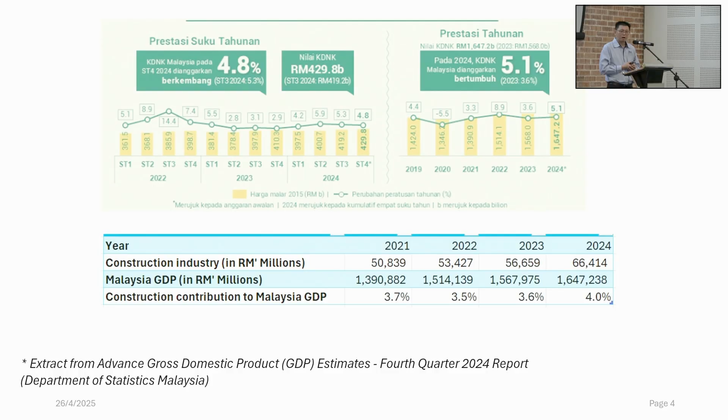Okay, these are the challenges I just mentioned. Skilled labor shortage, and then also we find that by using conventional, a lot of time, not all. I think in this building the finishes are excellent. A lot of time we find that the client or the contractor complains to us, saying, I couldn't get the kind of finishes that my spec or my customer wants.

And then also traditional construction practice has a very high carbon footprint, and the two contributors to the carbon footprint are actually concrete, because in order to produce concrete we need to use a lot of heat, and the same goes for the rebars. So for traditional construction, the two main ingredients that we use are rebar and concrete, right? So it's not that precast does not use that, but with precast we can actually reduce the usage of concrete by optimizing the design, and also because it's done in a controlled factory environment, we are able to reduce the wastages, right?

And then the construction industry, in traditional construction, is also labor intensive, because first of all we need a carpenter, then we need a bar bender, then we need a concreter, etc. There are so many trades inside the construction industry.

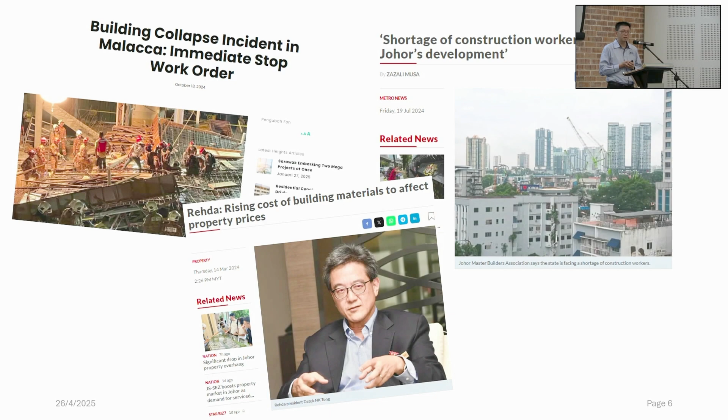Okay, so to overcome this, the precast concrete system can provide the industry a very sustainable construction method. On the environmental side, we can actually reduce material wastages, because like I mentioned, everything is done in a controlled factory environment. The concrete batching, the rebars, everything is prefabricated, and we only batch as much concrete as we require, and the concrete only travels within the factory, so you don't have wastage from concrete hardening and things like that.

Normally in a precast factory, we strive for energy efficiency by using solar panels and green resources. For example, instead of diesel, we use LPG, right? And in the factory we also recycle the aggregates. For example, when we batch concrete and still have a little leftover, we can recycle the aggregates for the next batches, right?

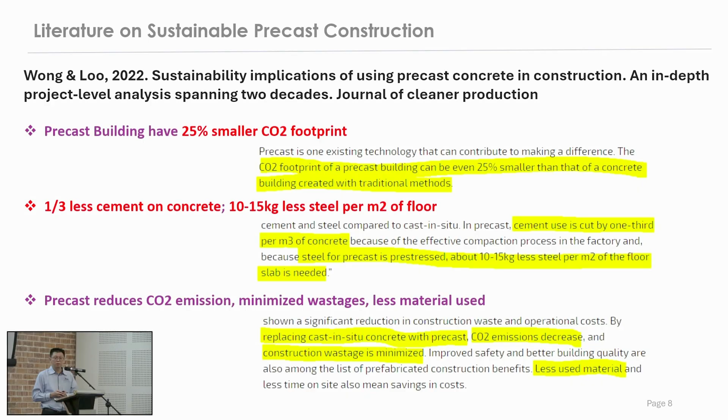And like I mentioned, in our products we use green concrete. Green concrete means we are replacing cement with alternatives such as fly ash and GGBS. And for the key ingredient sand, instead of using river sand, we can also use manufactured sand. What is manufactured sand? It is actually a byproduct of the quarry. We crush the rocks and make it into sand. And the advantage of manufactured sand is that it is more consistent.

I think the supply is also more sustainable, because with river sand sometimes we face the problem that you dig so much and it pollutes the river, then the authority will come in and say, hey, stop, you can't. So we will have supply issues. But if you use manufactured sand, your supply is very consistent because you actually crush it. You don't go and dig.

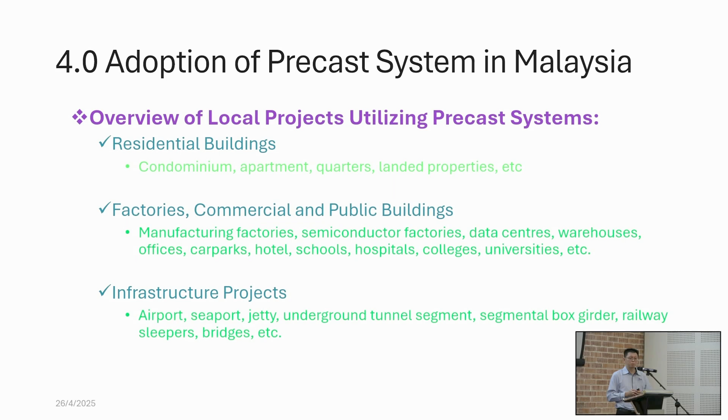So where are precast systems used in Malaysia? Generally, it has been used in all kinds of buildings - residential, industrial, commercial, public buildings, even in infrastructure projects. In the next slides, I'm going to show you the typical precast components used in Malaysia. The most common one is actually the hollow core slab.

The advantages of a hollow core slab is it can actually span very long. In Malaysia, we have done hollow core slabs up to 16, 17 meters. During construction, you do not need to prop. Later on I'll show you some site pictures where you span the slab 16 meters and you do not need to prop it. And hollow core slabs normally are able to take higher load because it is pre-stressed.

Beside hollow core slab, we have other slabs. We have the double T slabs - these are generally used for industrial buildings. And we have precast plank.

For columns, it's just like any columns, but normally precast columns will have a bit of corbel. Some architects may say, hey, corbel very ugly. But we try to make it nicer by introducing a funnel-shaped corbel. Later on, in the photo session, I can share with you some pictures of columns with corbels. Then you can tell me whether it's acceptable to you or not.

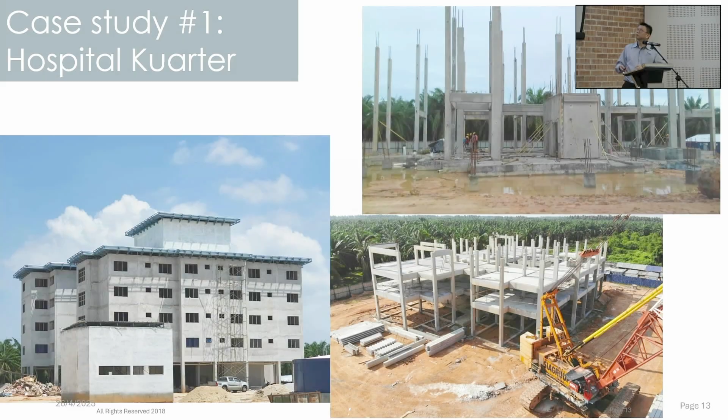And also what we normally do is it's an unpropped system. So you don't see scaffold on the site.

And this is IKEA. In fact, in Malaysia, there are 4 IKEAs. We started off with Damansara, then Cheras, and then we have Tebrau, and then lastly we have Batu Kawan. All 4 IKEAs are a total precast building.

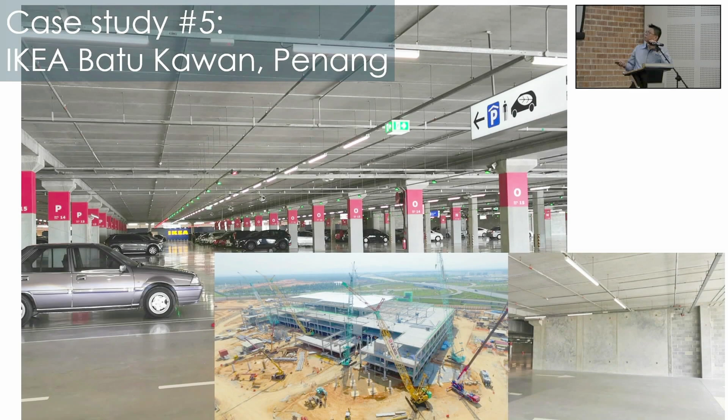There's a lot of restriction on your machinery height, and also your working hours. So in order to do it fast, to do it quick, what we do is we introduce multi-tier columns, and then we do the floor by floor on the beams and the slabs, and we try to minimize the number of components to install on site.

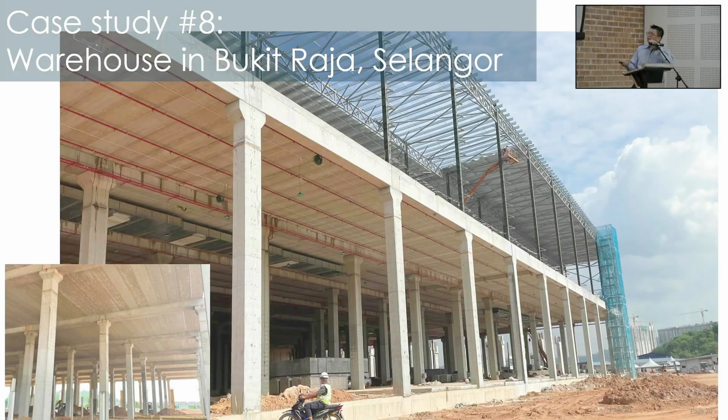So normally for front-end semicon factory, we will have these vibration requirements. I mean, every building has vibrations, but for this kind of building, they limit their vibration to a very small frequency, so that you need to overcome this.

What the engineers do is they make the slabs, or they make the building very heavy. So as you know, when the buildings are very heavy, even though there is vibration, it actually dampens it, so you don't feel it so much. So to do this, we actually use waffle slab for this kind of construction.

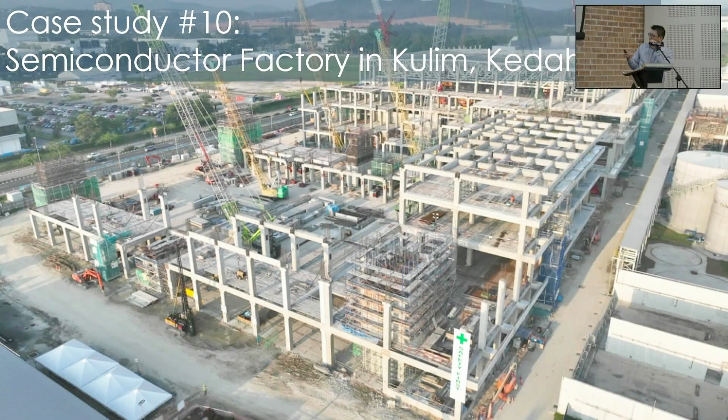This is actually 17.5 meters, and because it's 17.5 and the loads are very heavy, we can't use hollow core, but we have to use double T slab for this. And it's a total precast building, precast wall, precast column, precast beam, and precast double T slab.

And you can see that in this job, we have cranes sitting on the ground slab. The ground slab is reinforced to take the crane load, and then we will install the precast component from inside. And then from outside also, we have a crane to support the perimeter as well.

So this job is about 60,000 meters square. We separate into 2 phases. The whole building is supposed to complete in 6 months.

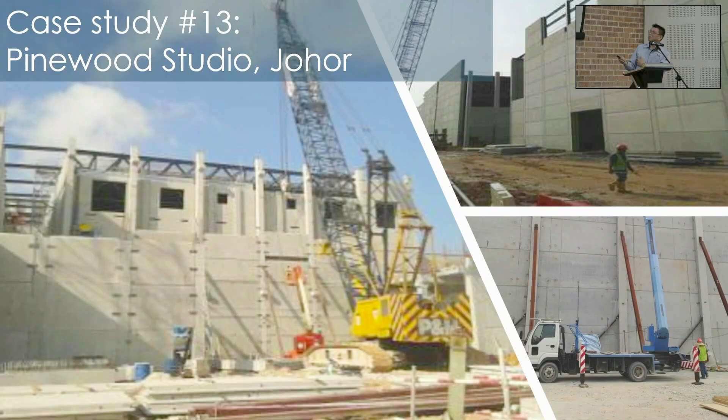And then the wall is on average about 12 to 15 meters high. So it's something different. We only did it one-off. Only this job is using this system. And besides that, precast can also be used for tunnel segments and also railway sleepers.

What are the challenges and solutions for IBS in the Malaysian market? The challenges are high initial costs, and it's very capital intensive. People are complaining about limited skilled workforce for precast production and installation, difficult to get people to do installation, and logistic and supply chain issues. Logistic means some of the components, if too big, we will not be able to deliver from the factory to the site.

So the solutions are, well, the government currently has incentives for investors who want to invest in green technologies. And for workforce training and capacity building, I think CIDB has done a good job. They have a lot of courses to train people in production, be it in the factory or site installation. And the government has also introduced a lot of TVET schools. So the government has done quite a lot to train people in the industrial building system segment.

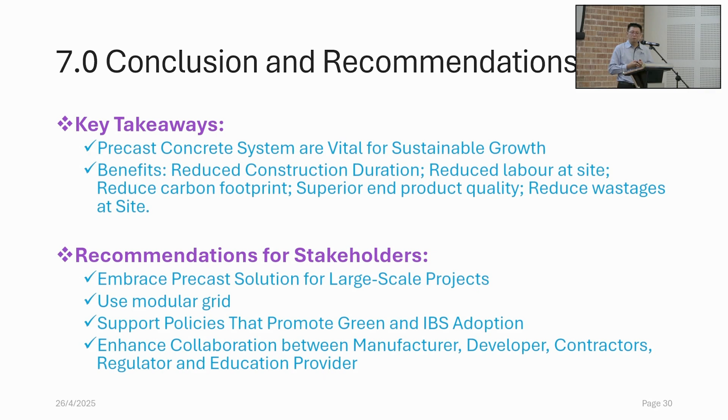So what are the recommendations? To embrace precast solutions for large-scale projects, because if you have economy of scale and your jobs are very modular, you can actually reduce your cost quite significantly, right? We need supportive policy to promote green and IBS adoption, and also to enhance collaboration between manufacturer, developer, contractor, and regulator. I think with that, that's the end of my presentation.

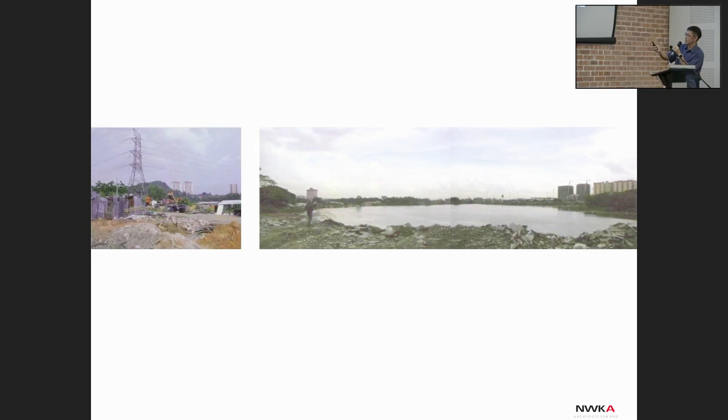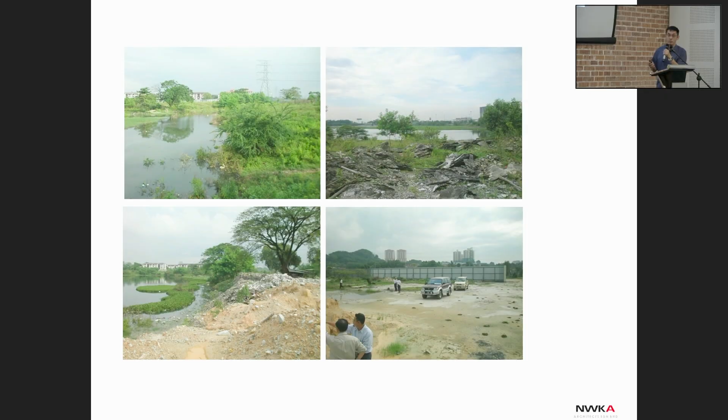And then when we got onto the site, we realized it's not just an ex-mining pond, it was also a dump site. And we had lots of squatters on the land. And we had a whole bunch of gangsters who had possession of the land, so to speak. So these are the challenges that we faced. And as we looked at it, there was a lot of pollution in the land as well. So before we could actually put up the campus, we had to clear all these things before the work could actually start.

And on top of that, that's the LDP, we also had to come off the interchange, so we had to deal with LLM as well. So you can see all these challenges prior to us starting the work for the campus. We had just over 2 years to do it. So the challenges were actually quite substantial.

And that was what was proposed on the site with the campus. And one of our intentions was also to retain the lake. And all this meant that there was a lot of preparation that we had to do before we could actually build the building. So that becomes a problem as far as construction is concerned.

The decision then to go on to precast became a viable option. One of the things that we did was, whilst we were clearing the land, the production and the planning of the campus itself could go on more or less simultaneously. There was a cost involved, but at the end, we did not actually come out to be more expensive because we've had to manage other areas in order to compensate for the cost that we had to pay the precast guys.

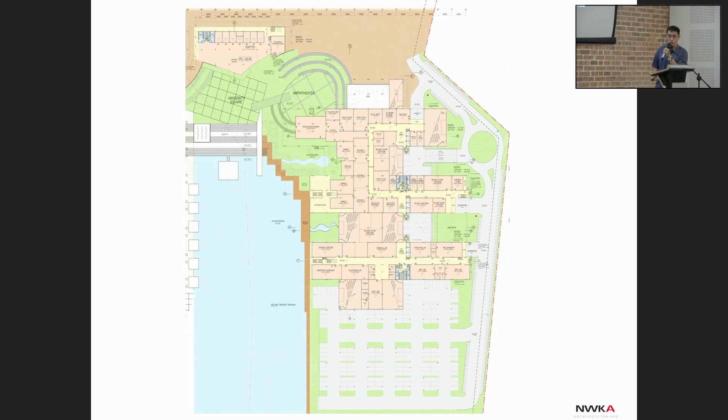So the campus in brief, on the lower floors were where the hospitality school is. So we had lots of kitchens and back preps and everything on the ground floor, or the lower ground floor, and having to deal with the water levels and everything. And then above that, we had a whole series of lecture theatres. And then above that, the faculty offices. And then above that are the classrooms and the teaching facilities.

So this is a view of us having reclaimed the land, and we had to dig up the entire lake in order to clean it, and then refill it with fresh grounds, and then allow the water to fill it back. And in the course of doing it, we also had to control the water from the Klang River, so we had to put in a stop gate as well. And as you can see, we haven't even started on the access from the highway because we were talking to LLM.

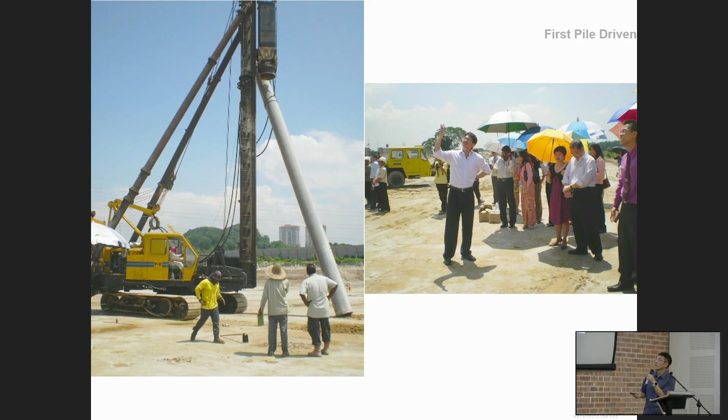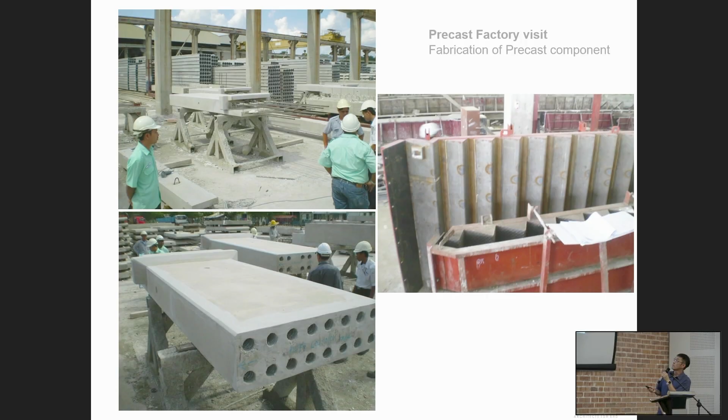And you can see that the whole thing, we've used the precast systems right through, columns, beams, stairs, planks, and even for the lecture theatres, when we actually had to step down on the terraces for the lecture theatres. Yeah, the stair details. And during production, we went on to visit the production factories as well. And this came along. And eventually we started on site. As the lake filled up, the floor steps were prepared, the ground conditions, and then we started with the precast systems coming up from the lower ground floor.

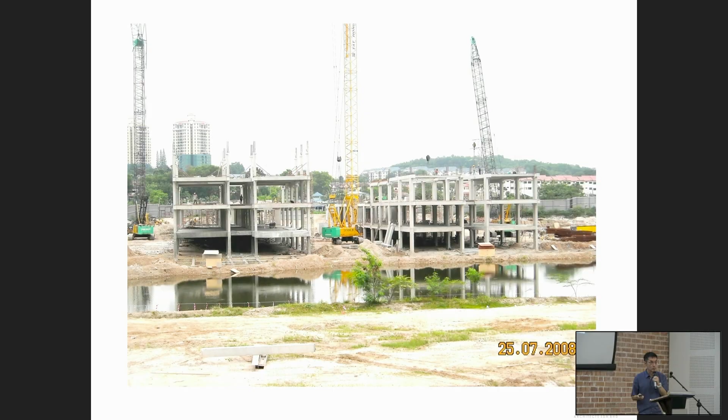And the building went up. So this is by 2008, middle of the year, we were up onto the 3rd floor. And it went pretty quick from then on because we had almost just about a year to deliver the entire campus at that point in time. And it went on up. You can actually see that the slabs are all in, and we've got the BRCs on top to put the screed over. The lift cores themselves were in situ, but the rest of it was precast system that we have used. The services were put underneath as and where is necessary for the drainage or some of the cables.

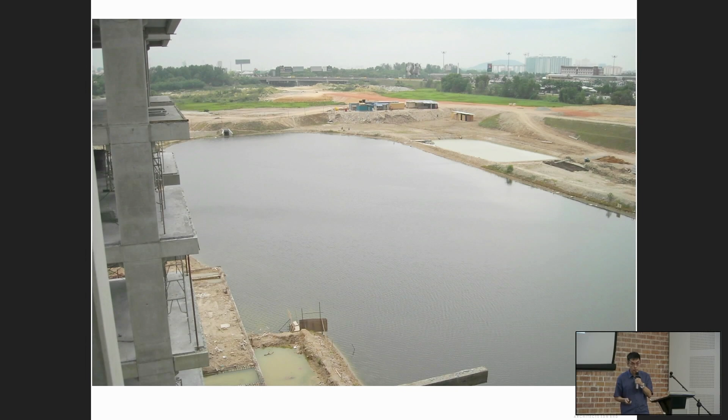And in the meantime, we were also at the same time monitoring the lake, because with this resurfaced lake, the issue here is whether we've actually been able to keep the water in, and if there's any leakages and the rest, and if there's any rectification that we need to do. All right, yeah. And then eventually, as we come to the finishing stages, the services started to come in. And there was quite a lot of design coordination as far as the services are concerned, because with the hollow core slabs, you had to predetermine where the services goes, and also how do you then manage the services as part of the overall aesthetics.

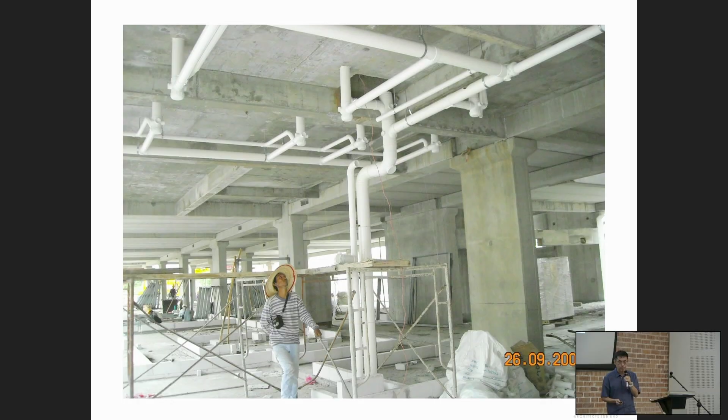One of the decisions that we've made is to actually keep the precast as part of the architecture, so it's got that industrial look about it. And the services therefore became very important in the way you want to organize it. So what we have done is to have actually created this central spine for the services to run. So we've ran all the aircon, electrical, fire, and telecommunications on this rack that ran down the spine. And in order to keep that look aesthetically, the services, as it branches out into the various spaces, it goes up, it doesn't go down.

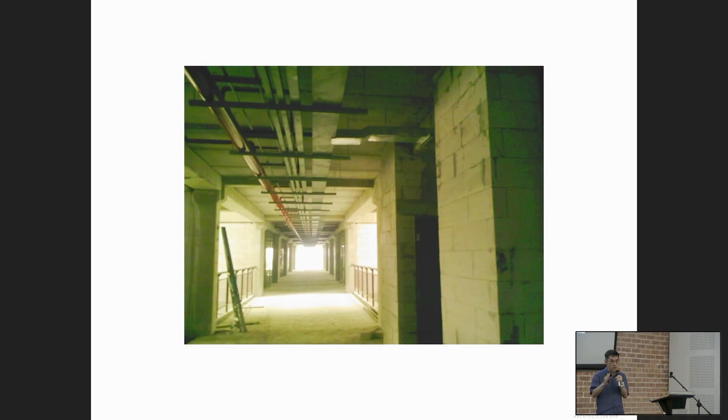And what we then did was to have the sleeves, which are all allowed for within the beams. Then we have the ability to keep a clean look on the bottom of the service spine. And whether it's aircon, electrical, or water, it all goes via the same way. Okay, and as we come closer, the buildings are up, the lake is taking shape.

And then we went on to the facade works. One of the things about this building, originally we intended for it to be panelized, but because of the cost issues, we had to mimic it using block work to create the panels, which we thought was reasonably effective to get that look. So we spaced it between the glazing and the panels, and then had the joints exposed as part of the architecture to create that symmetry and also the regulation of how the modules were going to run.

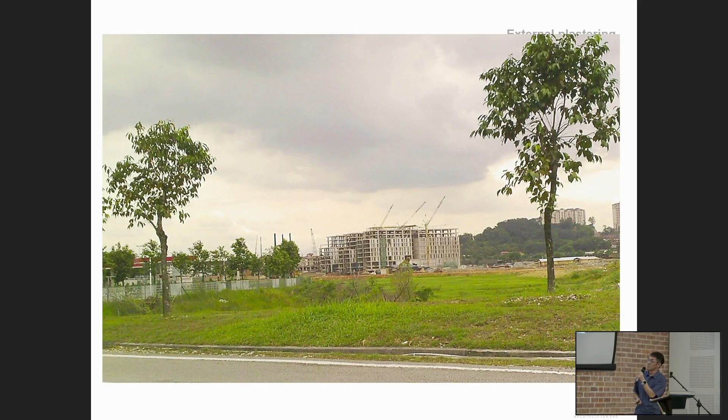Okay, and as we come towards more or less three-quarters of the way through construction, it started to take shape, and you can see the modular systems are actually quite predominant in how the architecture is being expressed. And later on, as we complete the finishes within the interiors, one of the things about it is the rest of it was all exposed as precast, but the floors we had to screed, so we had to control the level of that floor as well, and quite a lot of it was using actually the concrete as part of the floor.

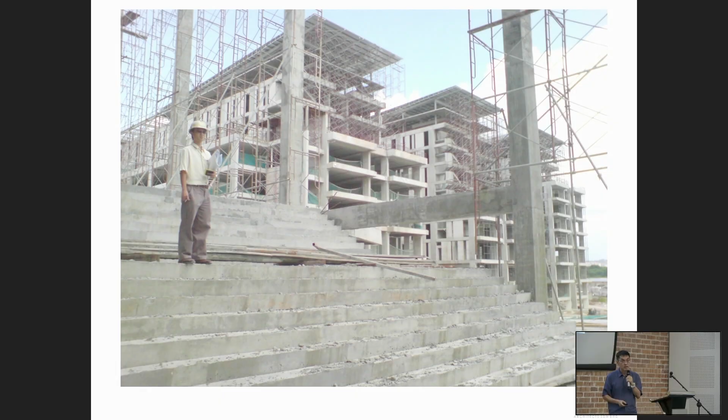And as we are coming closer, as the academic blocks were being finished off, the administrative block and the front was also being completed. And this is a shot from the boardwalk. The difficulty was in terms of establishing the buildings relative to the water, relative to the tide. Because we are so close to the Klang River, the threat of flooding is always there. And we actually created this differential to allow for a meter of water to go up and down. In the event that the Klang River gets too high, we actually close it off with the controls, and that stops the water from backflowing into the campus.

But I think in the last 13 years, we had one situation when we had a flooding in here, and the reason for that flooding was because it wasn't from the river, it's because we actually stopped the outflow. And the amount of rainwater that came into the campus was so much that it actually filled up and flooded the lower ground floor. And the big difference was when we had a drone shot, the water inside the campus was clean. It's clear water, but the ones on the outside were all muddy. So in that sense, it protected the campus. All right.

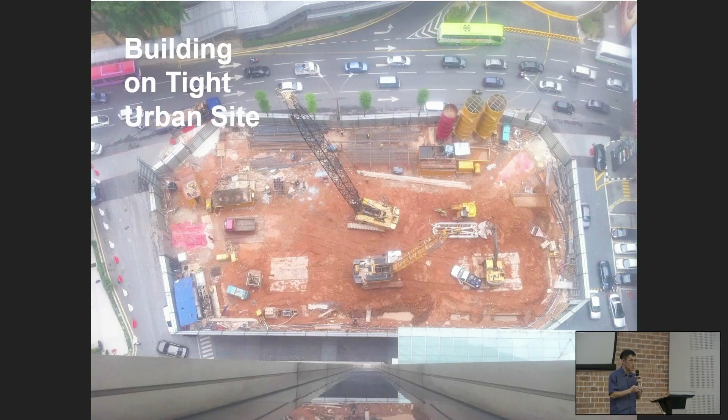We've got the 4-lane highway, Raja Chulan, on the top side, and then the car park access on the right, the car park egress on the left, and the drop-off areas for Pavilion Towers. So in that, we had to build this building, and whatever you need to come in and out for the contractors, it became a huge problem. So again, bearing in mind the constraints of the site, having a manufactured system done outside the site makes a huge difference to the way that we can actually build this.

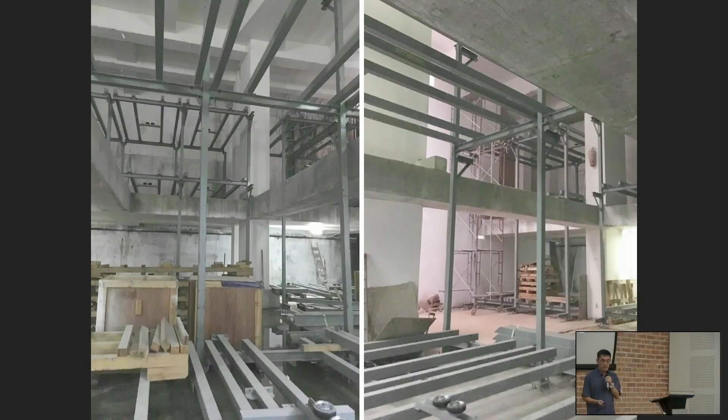So this is the automated car park. It is another interesting development from the point of view that everything is manufactured off-site, and we are able to incorporate the number of cars that we wanted to, compared to a conventional system where you would probably have to go down quite a few levels, bearing in mind that there's a limitation in terms of how you can run the ramps and everything else.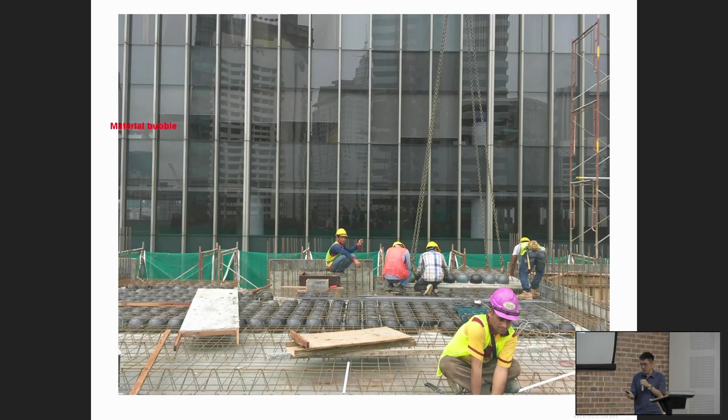It's a very interesting system that demonstrates what an IBS system can do. This helps us in reducing concrete pours, while at the same time allowing us to do it in a fairly consistent manner. The pours are very regularized concreting, but much less in terms of the quantities that we require.

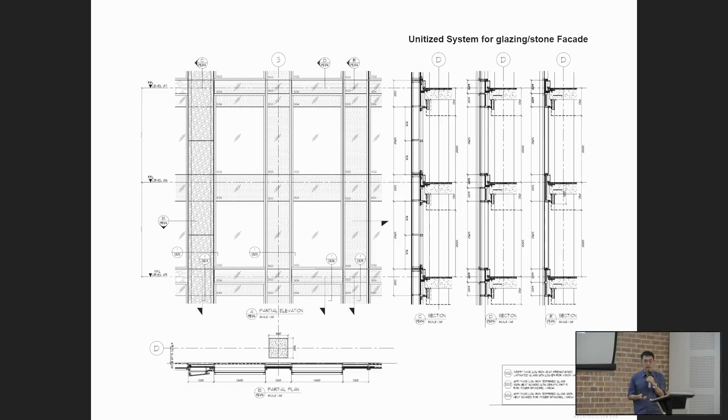The entire facade is based on a unitized system, with a combination of granite and glazing. These are some of the details. We've always got the granite in front, then the aluminum back panel, and the various drainages that we need to contend with.

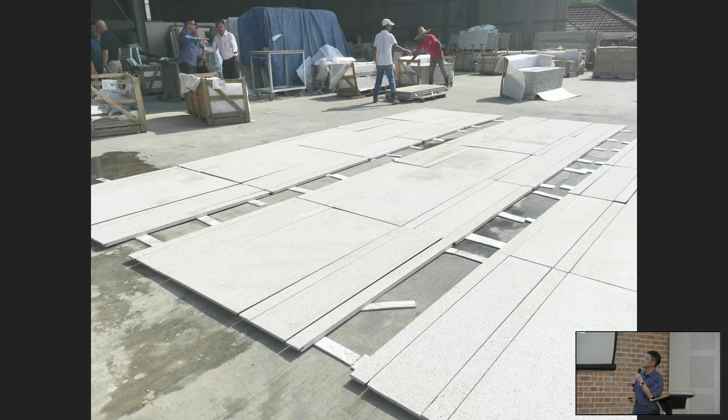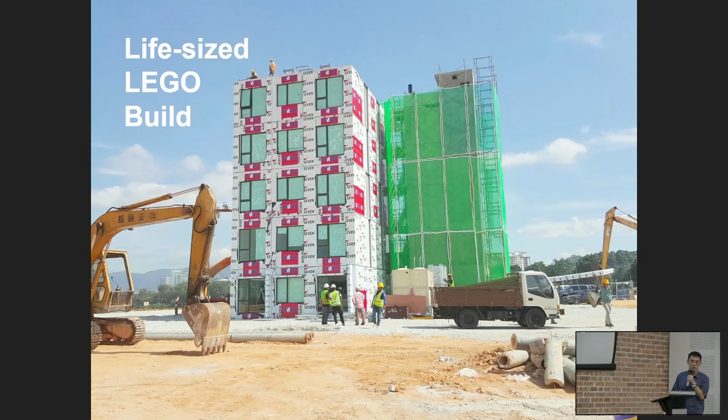Now I want to take you to something else beyond these two buildings, the PPVC systems. We've also experimented with PPVC systems - prefabricated, pre-finished volumetric construction. We did this in Kota Damansara. Essentially these are apartments, manufactured off-site and then brought onto site to be assembled.

What we did was we had to build the stairs first, and then the corridor areas to lock in the PPVC systems, which looks like that. So a typical module is about 6 to 7 meters.

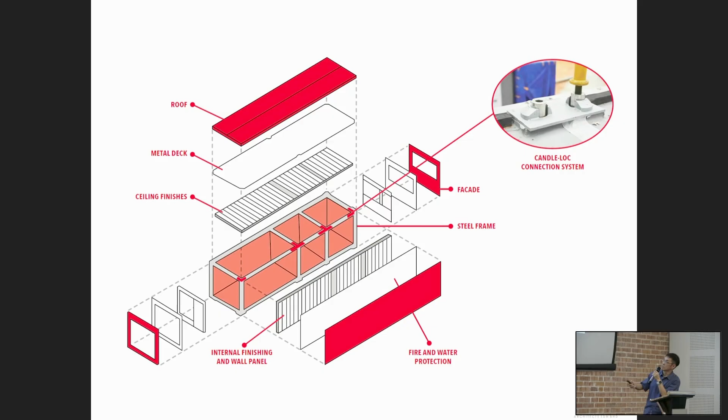It's about 3 meters wide, and the whole thing is actually made of steel, using what's known as a Candle-Loc system. The whole idea is that it's a steel box, all pre-finished, and then it's locked into place at the corners using this Candle-Loc system, fixed at these points, so that you actually stack them up and lock them in.

They are manufactured again in the factory, so all the finishing is done off-site. Then it's transported to the site on these prime movers, and lifted and stacked on top of each other. This is a typical unit - we've got three modules, 1, 2, 3, and then we lock them in sideways, and we lock them in above as well.

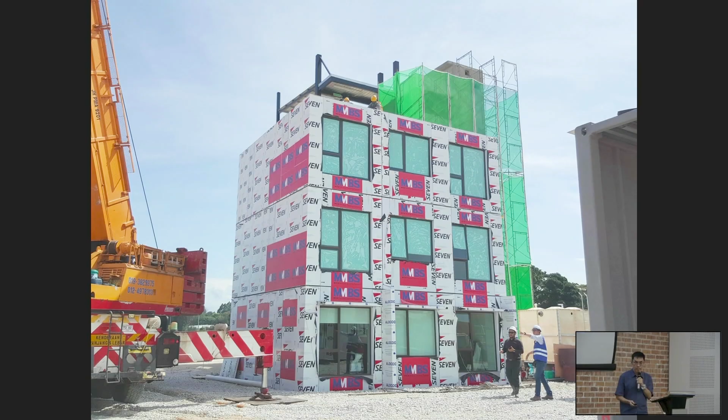So as we stack them up to the 3rd floor, and eventually we've got this finished as a 5-floor typical apartment.

This was very interesting in a sense that we did it out of steel. I don't think too many people would try steel because of the cost, but it definitely was very precise. And as Lee was saying, the finishing was quite incredible. The tiles all line up right down to the millimeter.

The door finishes, the frames, everything fits as what it should be in your drawing. And when they put the modules together, it fits, and what you need to do is then just seal the joints. But they all actually come within the tolerance. So your usual CPC inspections, it is really, what's the word, easy relative to what you would see in normal construction.

And this system, because of the precise nature of the PPVC, it makes it much easier to control the tolerances as well. And the Candle-Loc system actually helps to give you that adjustment. It's a brilliant system, I think.

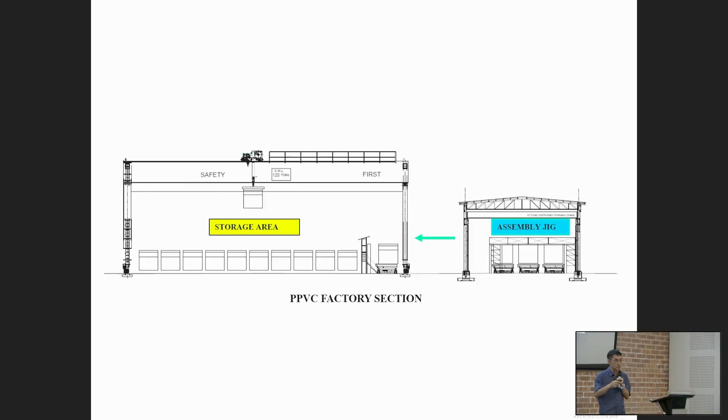We had to actually get a factory to manufacture this. So in order to reduce transportation, this kind of mobile manufacturing locations would be a great asset to keep it near where your site is. And generally once they've done that, then they lift it and put it in place.

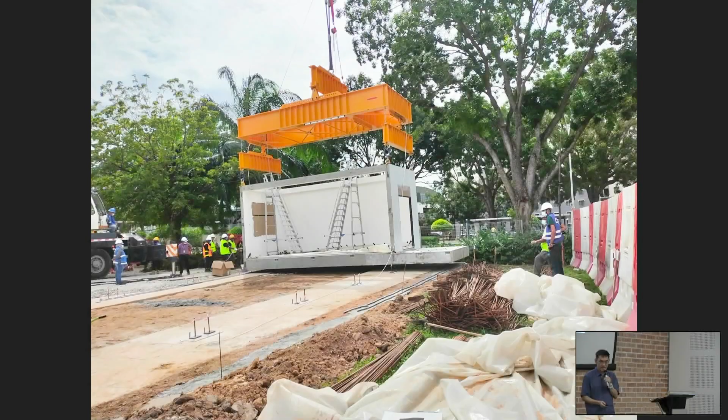And then you see the modules being transported to the sites. And again, schools are very tight sites because they don't normally have your bomba road that goes around. Somehow we managed to get away with that. And then they were plonked in place.

So you can see the foundations are quite interesting because they are actually in a strip, and we lock them down and it sits on a beam, and then that module with the corridor. And when you put them all in a row, it becomes the makings of a school. And we stack them on top of each other to get whether it's 2-story or 3-story.

And then the trick was then to fill the joints. And this is where you see that the contractors are actually putting in the screeding to finish it off. There were issues with this because in terms of the final finishing, it's still a labor-based type of construction, so it's not as clean.

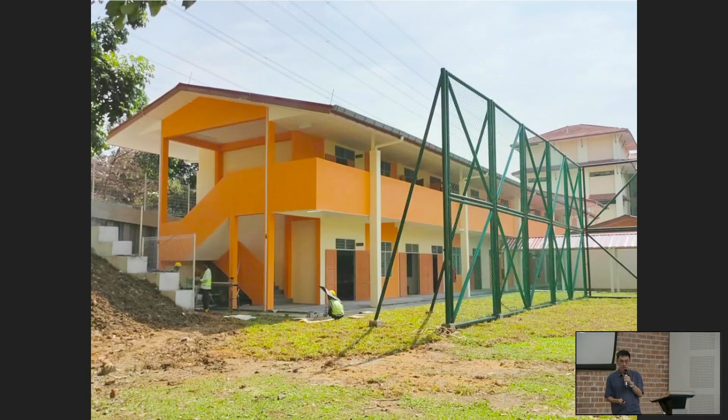And the final product looks like that. Typical school. And you wouldn't have been able to tell the difference whether it is in situ or precast. But the biggest thing about it is that we completed it before the school started, so we managed to do it within the 2 months. This is another one. So in all, we actually built 5 schools in 2 months. It's quite an interesting challenge.

Okay, 35 classrooms, yeah. So the internal feels a little bit like this. The only slight drawback about this is that you can see the beams for the modules, because each module sits on its own frame. You get more beams within the classroom. So you just got to allow for a higher ceiling.

So our overall experience of IBS, for sure, quality is much, much, much better. You're able to control the finishing. You're able to control the details. And because they are all off the factory, you have the opportunity to test it out, get it done before it actually hits site. And when it hits site, it's essentially a manufacturing process.

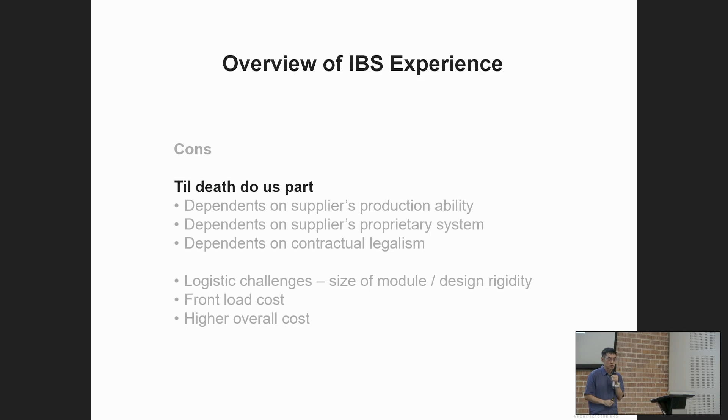Generally, it's a higher cost if you go into IBS prefab systems. But having said that, when we did Taylor's Lakeside campus, we managed to build everything for 160 ringgit per square foot, including the prefab system, including the water, including the highway connection. So it didn't quite cost us more. It means you have to balance out how you allocate budgets for the different things.

One of the things I like to ask is about the future - where are we going? I want to share this project we did. It's not quite a fully IBS project, but it's something that could affect the paradigm of how we look at things.

This project is called the New Ocean World, located in Jalan 19, PJ. It's a building containing 20 food outlets with a banquet hall and a cigar bar right at the top. This is interesting because it encourages us to look at IBS in a slightly different way. The facades have the usual glazing and screenings, and we have the cigar bar at the top. The entire roof garden is currently being renovated so it becomes a happening place.

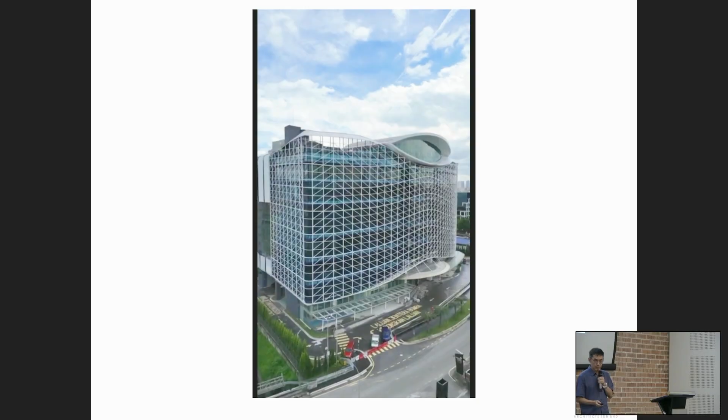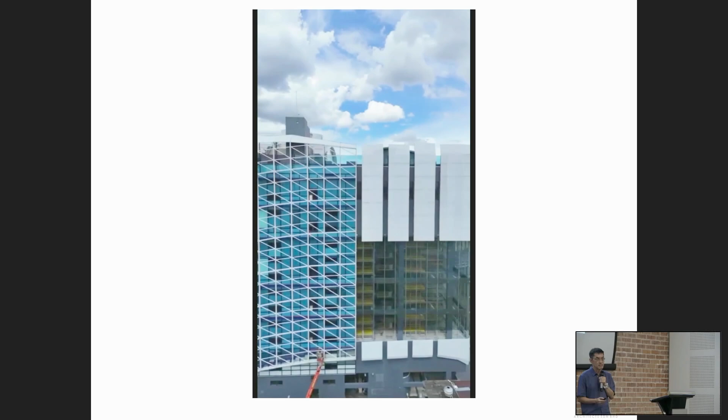I've got a video that runs showing this. We struggled with the unitized glazing contractor - a massive problem we had with them. This eventually got built, and the main contractor kindly assisted. We had to do a lot of work to overcome those problems.

What I really want to talk about is the picture on the left. We introduced a 600 automated car park system with no conventional parking. These 600 car parks took the place of your usual ramp and concrete system, so we actually eliminated 7 floors of traditional, conventional concrete car parks and essentially created this automated system instead. It's not quite yet recognized prominently in the IBS system, but by using this kind of technology, it's a bit of a paradigm shift in this country.

In Japan and Korea this is quite a common system, but in Malaysia, not so. By eliminating those 7 floors of concrete, we freed up a lot of space, and the volume of in-situ construction reduced significantly - bearing in mind we were trying to get this off as soon as possible. The great thing about this automated car park system is the floor-to-floor height for parking is only 2.2 meters per rack, and the 7 floors of car parks are now pushed down to about 5 physical floors. That saved us a lot in terms of physical space we had to provide for the car parks.

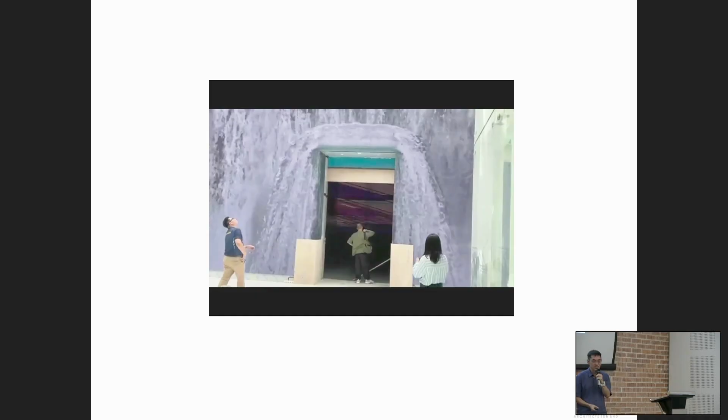This is actually a digital wall, a 3-story high wall at the back of the lifts. We have some fiber optic lines also. That's the lobby, and this is the banquet hall of the project.

And in the banquet hall itself, this is where it gets interesting, because now the walls are used as digital walls. It's a 3-dimensional digital wall. Okay, and they are able now to run a lot of graphics and videos on the wall, and it's actually coordinated with the ceiling as well.

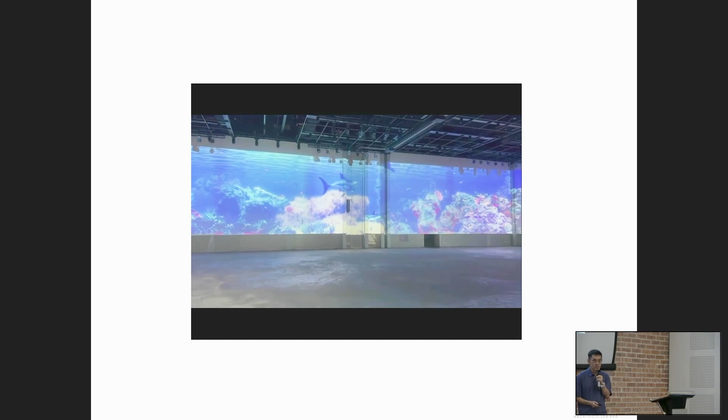So when we look at industrial building systems, these are the new things that are coming into the market. So how do we then recognize them as part of our construction system? Okay, and it's turning walls into media functions, and it just changes the dynamics of space.